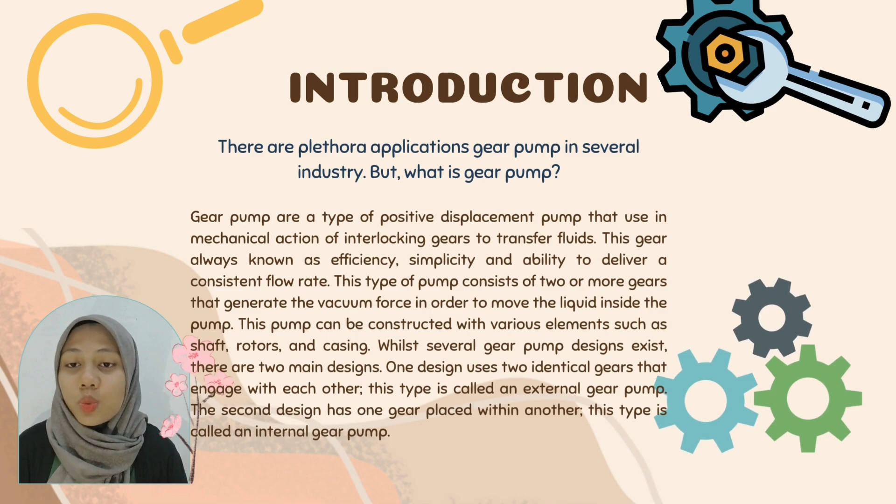There are two main designs. The first design is two identical gears that engage with each other. This type is called an external gear pump. The second design is one gear placed within another. This type is called an internal gear pump.

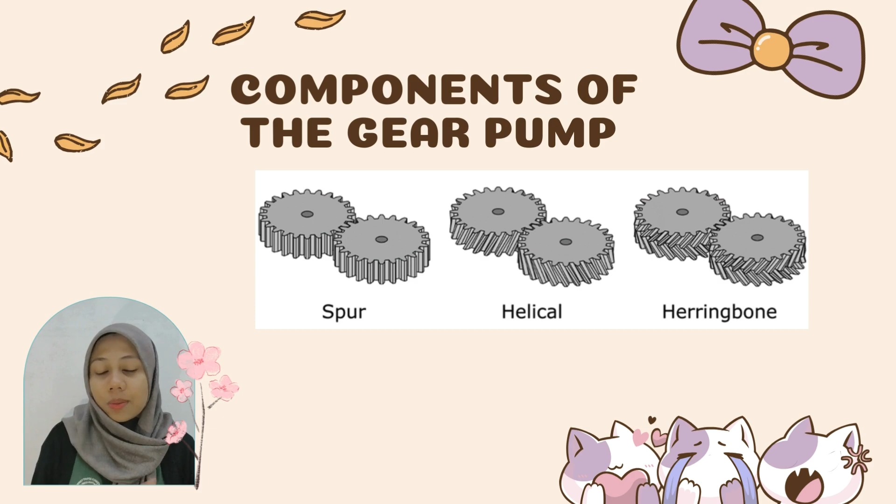The gear that we use in a gear pump is a spur gear, but it's not unusual to find pumps that employ helical and herringbone gears. It is because they can provide a consistent flow rate that can reduce the pressure fluctuation compared to spur gears. They are also preferred for applications that require a huge capacity or flow.

There are three important components in an external gear pump: gear, shaft and bearing, and casing. For the gear, typically we use a spur gear, though helical and herringbone types may be used for the smoother flow. Shaft and bearings are used to support the gears and maintain the alignment. Casings are used to enclose the gears and form suction and discharge ports.

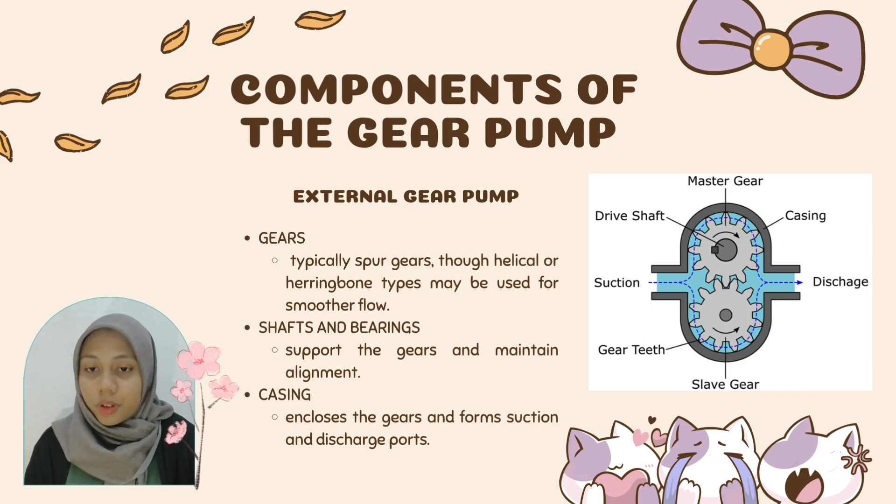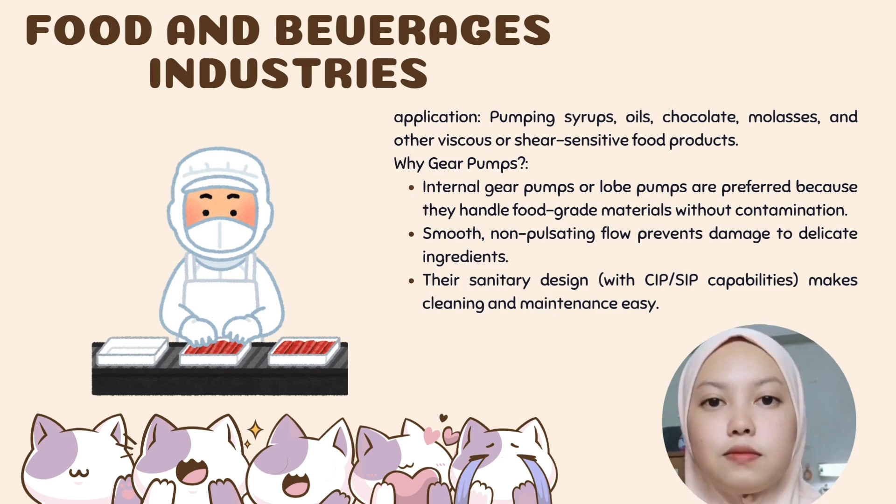Now, moving on to the pharmaceutical and cosmetic industry, gear pumps are critical for handling creams, ointments, gels, and other viscous formulations. They ensure high precision in

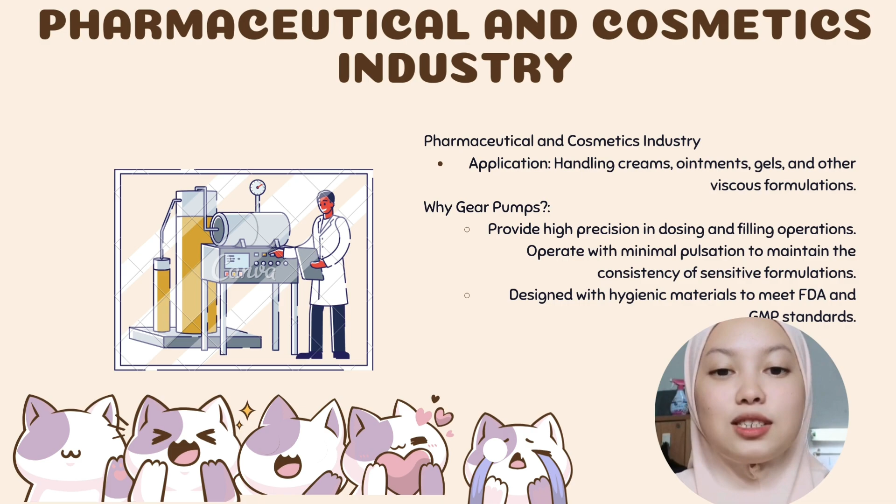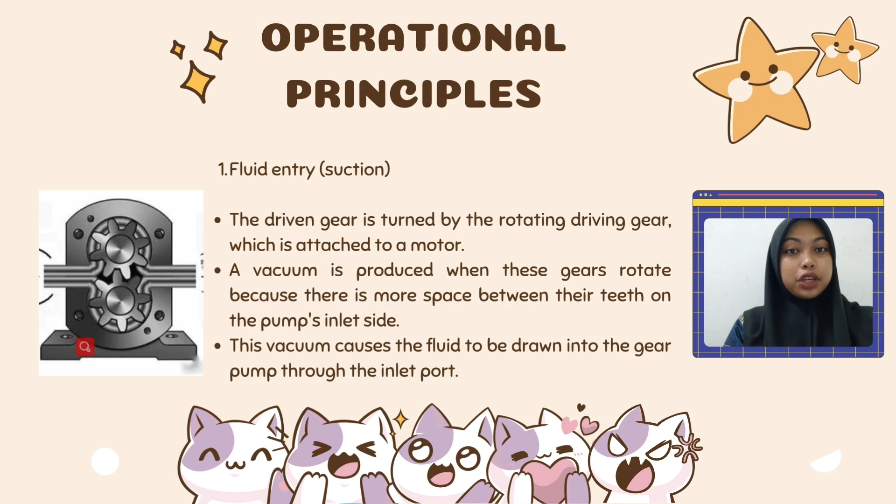There are three operational principles in a gear pump: fluid entry, fluid transport, and fluid pressurization. For the first principle, which is fluid entry, as the driving gear, which is connected to a motor, rotates, it turns the driven gear. Then, when these gears rotate, the space between their teeth on the inlet side of the pump increases, creating a vacuum. This vacuum causes the fluid to be drawn into the gear pump through the inlet port.

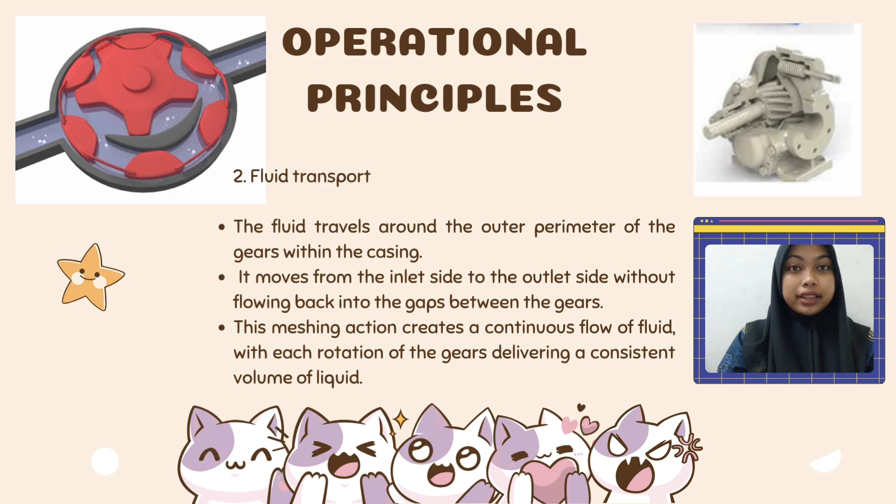Next is fluid transport. The fluid moves within the outer layer around the outside of the gears, and because of the tight fit and the meshing of the gears, it flows from the inlet side to the outlet side without returning to the spaces between them. Other than that, the movement of the gears effectively transports the fluid from the suction side to the discharge side of the pump.

The last operational principle of a gear pump is fluid pressurization, which is discharge. For the discharge part, finally the pressurized fluid is expelled through the outlet port, completing the cycle. And as the gears continue to turn, the meshing teeth come back into contact on the outlet side of the pump, decreasing the space between the gears. This action compresses the fluid, increasing its pressure.

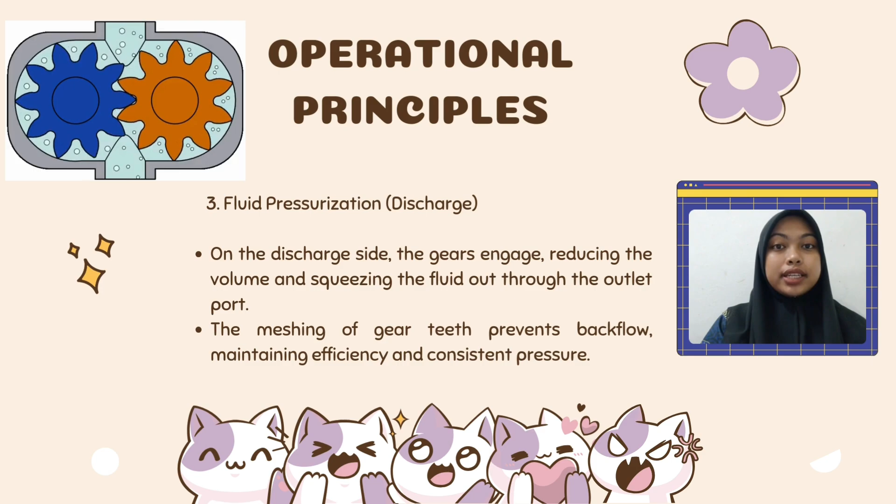Lastly, I'm going to discuss the advantages and disadvantages of gear pumps. For starting